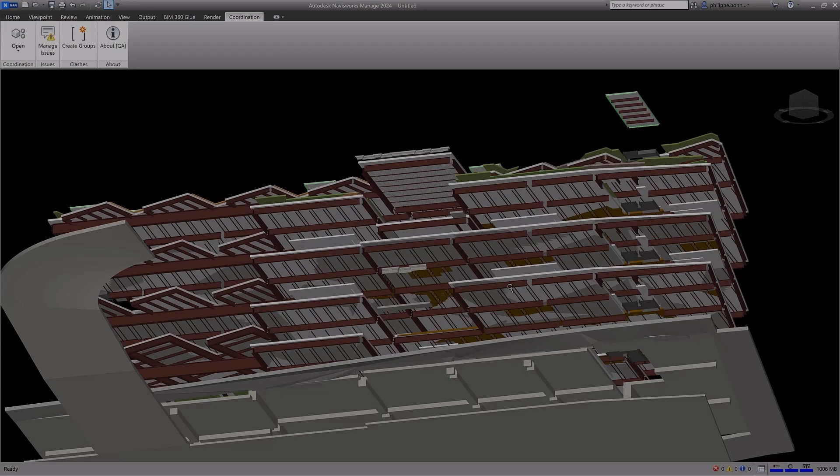New features and enhanced workflows in Navisworks 2024 connect Navisworks Manage to the Autodesk Construction Cloud and to civil engineering projects. Before a construction project breaks ground, it is important to identify and resolve constructability issues. The Model Coordination module in the Autodesk Construction Cloud provides automated clash detection features to help you quickly identify coordination issues for models hosted on Autodesk Docs.

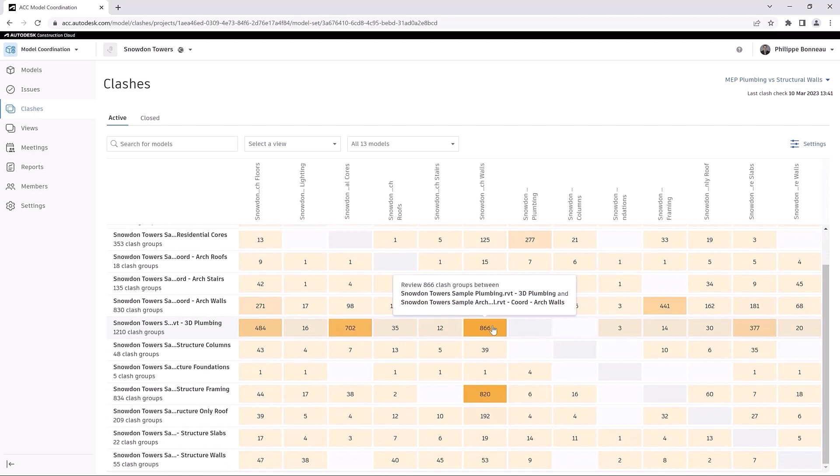In the Settings area of Model Coordination, you can designate one or more folders to be used as coordination spaces. Clashes are detected automatically when you add models to those folders. Clash results are displayed in an intuitive matrix, and the updated clash detection engine displays the results faster than ever before. You can choose different coordination spaces for different purposes and workflow types.

For example, you may need to create a coordination space with automatic clash detection turned off to use Navisworks clash capabilities only. As a result, the Clashes tab displays a message informing that clash detection is unavailable for this coordination space, though the other tools remain available.

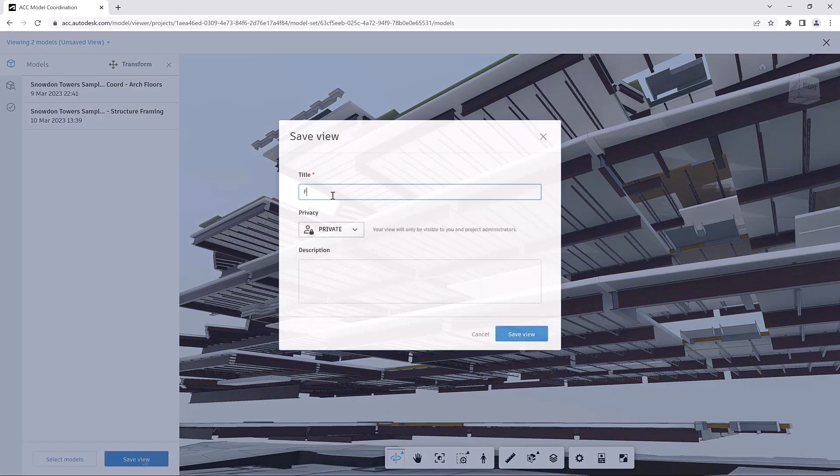With these models aggregated in Viewer, you can save them as a named view, making it easier to access the model content later. You can open models in Navisworks directly from coordination spaces in Model Coordination using the Coordination Issues for Autodesk Navisworks add-in. You can also search for projects within a selected account.

Contributor name, company, and profile pictures are now available, showing the latest user access and time of the last update. Columns can also be resized to focus on model details, and tooltips are available if names are truncated. You can quickly filter the list to show coordination spaces with clashes turned off.

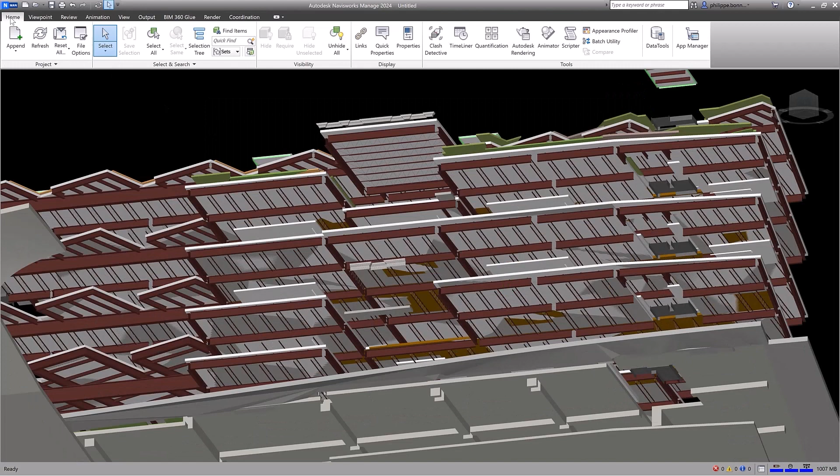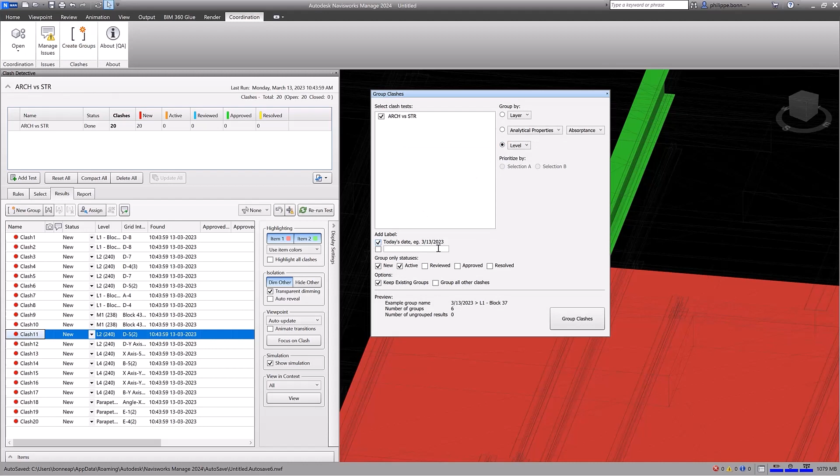With the Clash Detective feature in Navisworks, you can perform advanced clash detection on more than 50 file formats. Navisworks Manage enables you to review individual clashes in context to help find and resolve conflicts. You have access to comprehensive tools for grouping your Navisworks clash data by model hierarchy, specific properties, or level information. You can customize your clash groups by adding a prefix or date label to help organize the results.

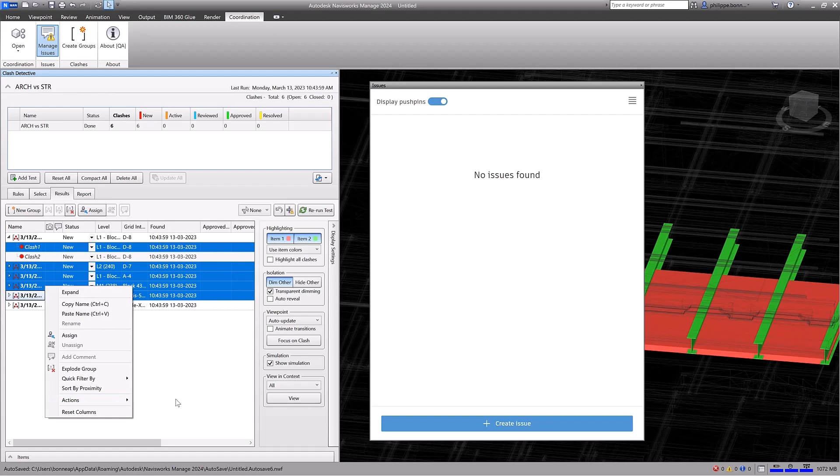Create and share issues across the project team to simplify communication during the model coordination stages of your project. You can also batch create issues from multiple selections, including groups. The issue titles will automatically include the clash tests and group names, and you can populate the form with key information needed for the issues.

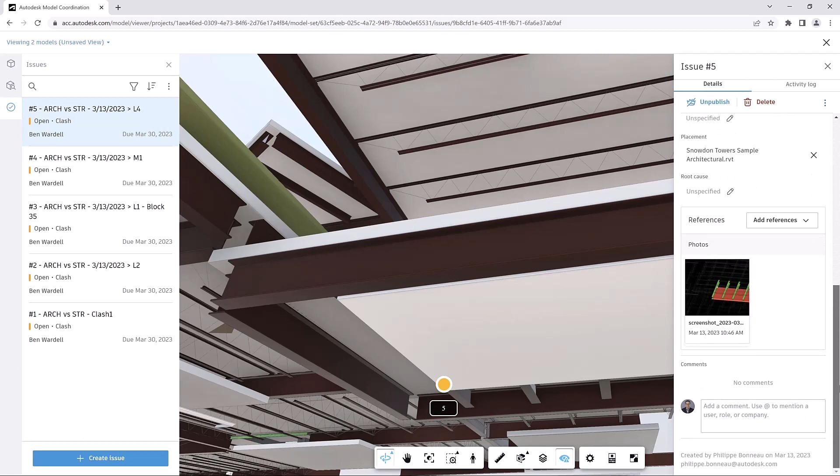Created issues are available in the Issues tabs of Model Coordination, regardless of whether they were created in Model Coordination, Navisworks, or Autodesk Docs. Issue details can be reviewed by a wider audience, improving collaboration and issue resolution. The ability to seamlessly share issues between Navisworks and the Autodesk Construction Cloud enables the features of these products to be used in tandem during the model coordination of your projects, providing a single source of truth for your entire project team.

Navisworks 2024 also supports Civil 3D alignments to improve detail quality and collaboration. You can aggregate the model in Navisworks and identify Civil 3D alignments to review. The control window allows you to customize the frame, aspect, and navigation of the alignment and section view.

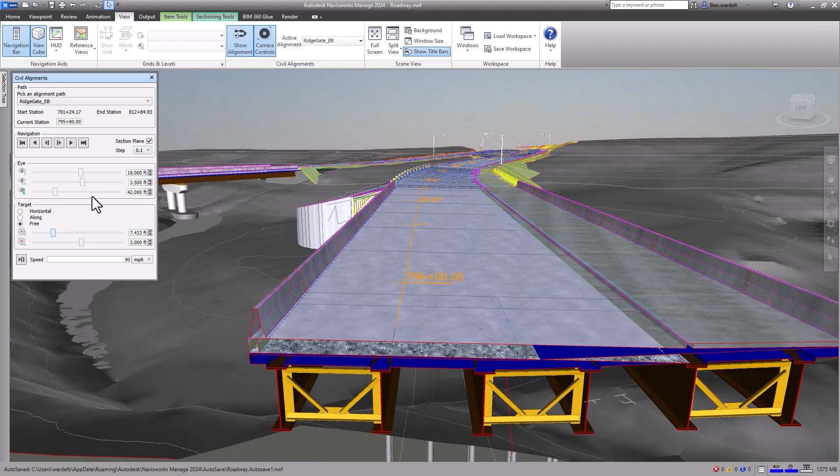This improved control enhances the coordination between design disciplines and makes it possible to identify design inconsistencies and issues prior to construction. Expanding the capability for civil engineers to review and coordinate models leverages the complementary capability of Navisworks and the Autodesk Construction Cloud.